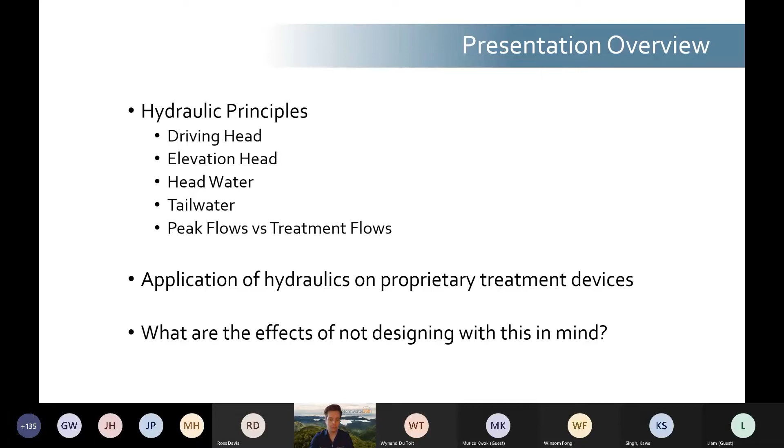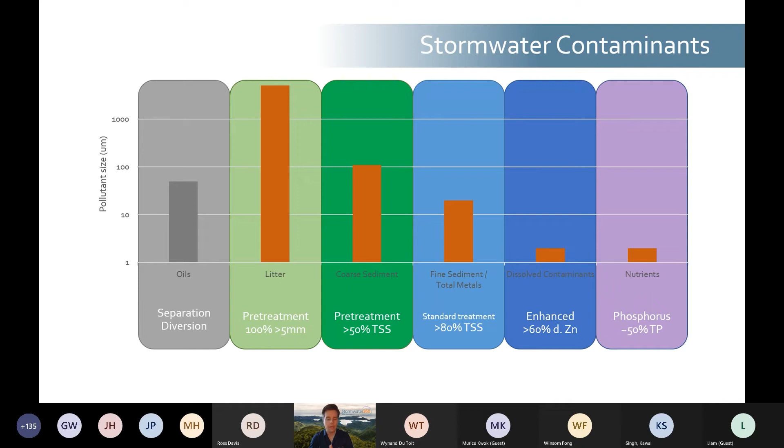Typically for oils and hydrocarbons, we look to divert. For pre-treatment, we're looking to capture 100% of litter and trash greater than 5 mil, and down to the standard treatment, in New Zealand the standard is around 75% TSS removal, while overseas it's around 80% TSS removal. For each of these types of treatment, there are different types of treatment devices designed to provide that level of treatment. For example, within the pre-treatment perspective for coarse sediment, generally speaking we're targeting 50% TSS removal, and that is achieved using a gross pollutant trap, a GPT, or a hydrodynamic separator.

If we're looking to do nutrient removal, we might have to go towards green infrastructure. That might be a rain garden, a swale, a wetland, a pond, or even a filter or a bioscape. So within each type of treatment, there is a range of devices.

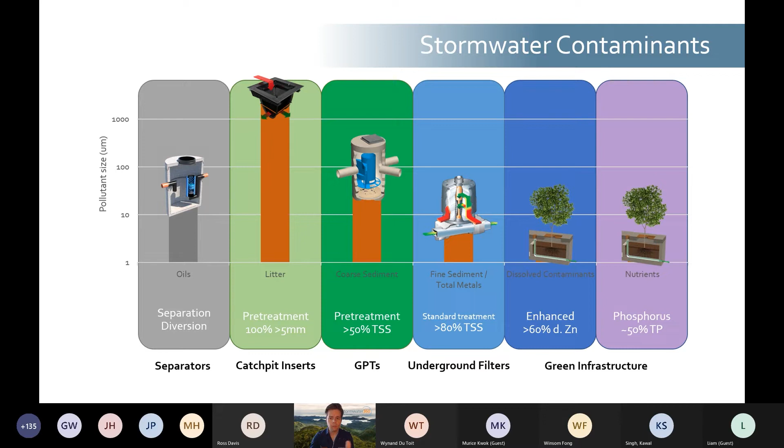Within regional council, district and city council guidelines, there are steps laid out for how to design treatment devices. Auckland Council has GD01, there's the Waikato Stormwater Management Guide, the Christchurch Waterways and Wetlands Guide, and NZTA, now Waka Kotahi, has a stormwater treatment standard for state highway infrastructure.

What is really important to note, though, is that these guidelines lay out the level of treatment that is required and the type of devices that can be accepted. But these aren't based around the hydraulic design of proprietary or manufactured treatment devices.

So if the guideline looks at the design of a sand filter, that is from first principles, looking at the driving head and so on. Same with the rain garden, it is a first principles design of how to design that treatment device rather than a proprietary device. But also importantly, they look at the device in isolation and don't talk about the integration

of any treatment device, whether proprietary or not, into the stormwater network, from a hydraulic or other perspective. So back in 2016, Kevin and Troy Brockbank, who was with Stormwater 360 at the time, wrote a paper for the Stormwater Conference.

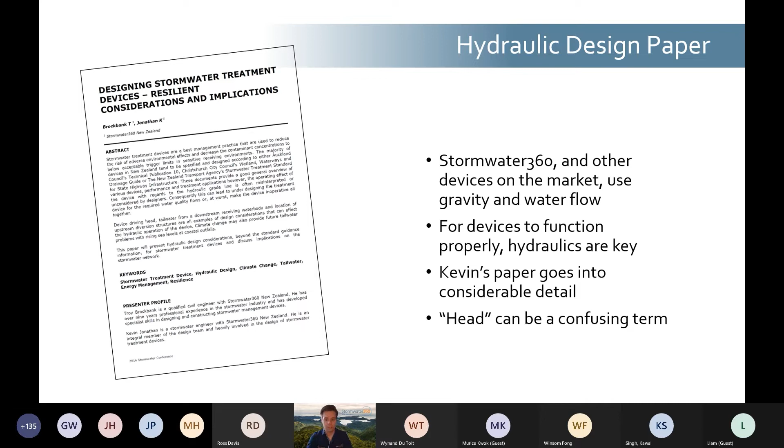Cool, thank you for that, Matt. So today we're just going to briefly go through some of the basic hydraulic principles that can be applied if you want to design a hydraulically efficient treatment device.

Many of you are probably already familiar with this when designing a reticulation network. Just bear in mind that the hydraulic design of a stormwater treatment device is no different to a typical node or junction. One of them, as you can see on the screen, is a continuity equation, a simple flow calculation using the product of velocity and cross-sectional area of flow.

Next is the energy management for flow in a pipe. It is basically the total energy upstream equal to the total energy downstream plus head losses from friction. You can see the graphical representation of that in the presentation.

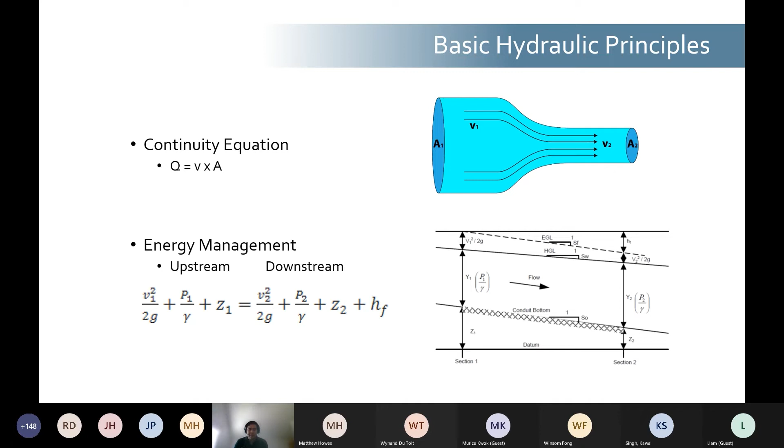So next is the hydraulic gradient, defined by the change in hydraulic head or driving head over the change in length, usually represented by the hydraulic grade line. It can be calculated in either the horizontal plane or vertical plane, as you can see in the graphics as well.

So next is Darcy's law. It is the principle used to calculate the driving head required for flow of fluid to go through a porous media.

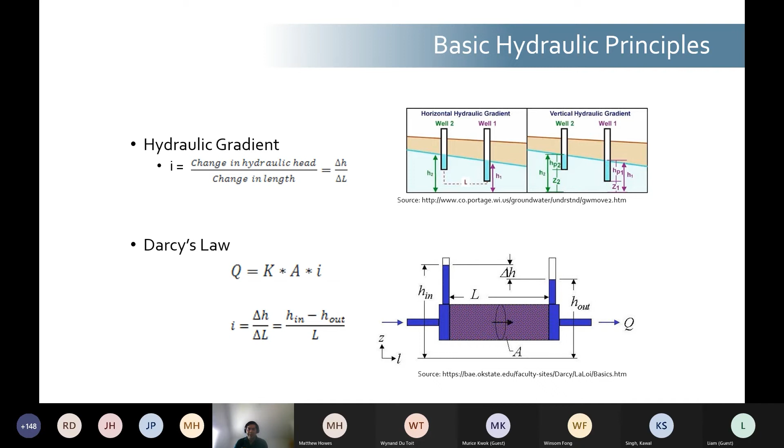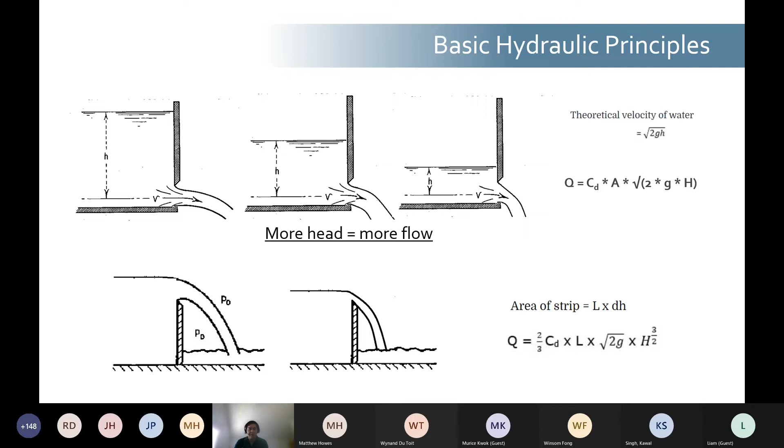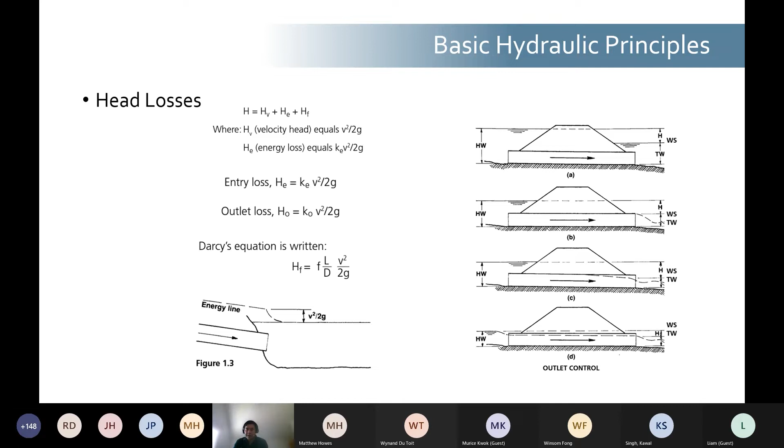So what we're going to do is take some of these principles and terminology and apply them to our proprietary treatment devices, and we're going to categorize them by the type of device and their general functionality.

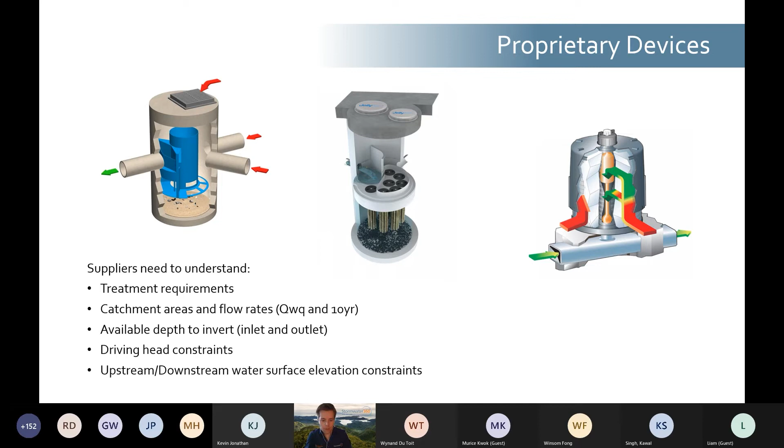So what I'm going to do is pass to Kevin, who's going to run through elevation head.

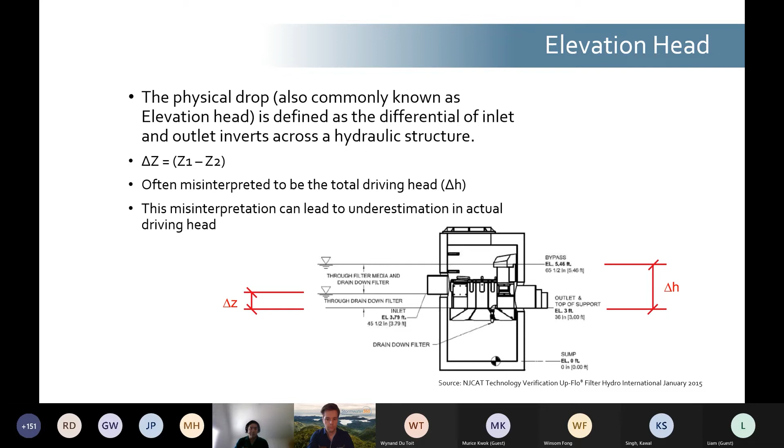If you actually use delta Z as the total driving head in the hydraulic grade line calculation of the network, you will have an unintended surcharge to your upstream pipe network. If this isn't accounted for, it can cause localized flooding to the upstream catchment. Matthew will now go through some examples of this physical drop using a few of our treatment devices.

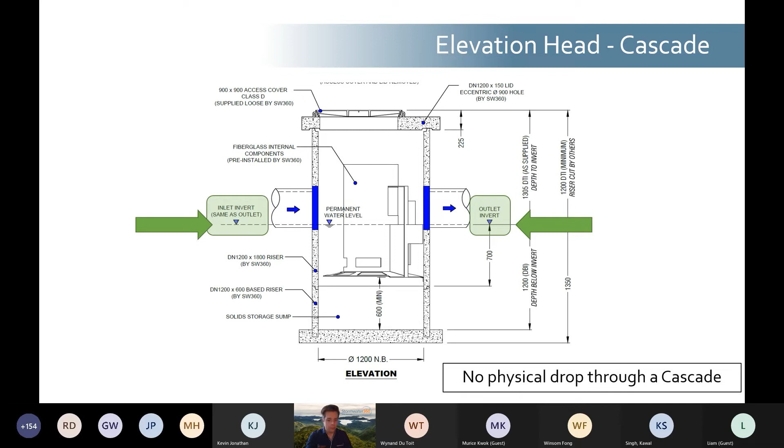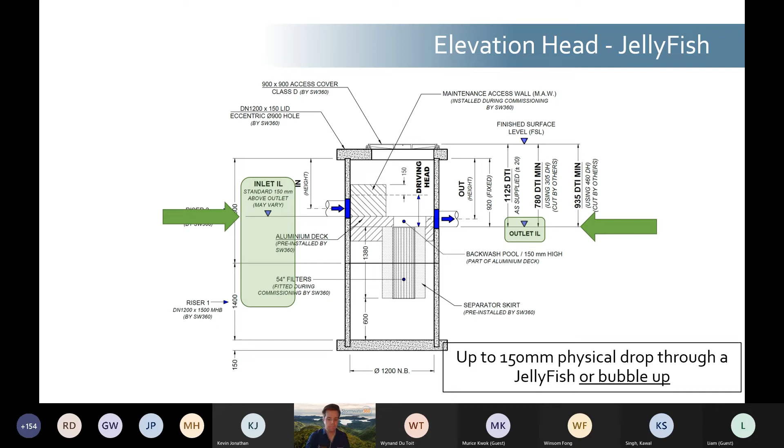So you can see that for these devices, the GPTs, gross pollutant traps, the inlet and outlet are at the same level, but for other treatment devices, there is a range of falls, or elevation head, or physical drop through those devices.

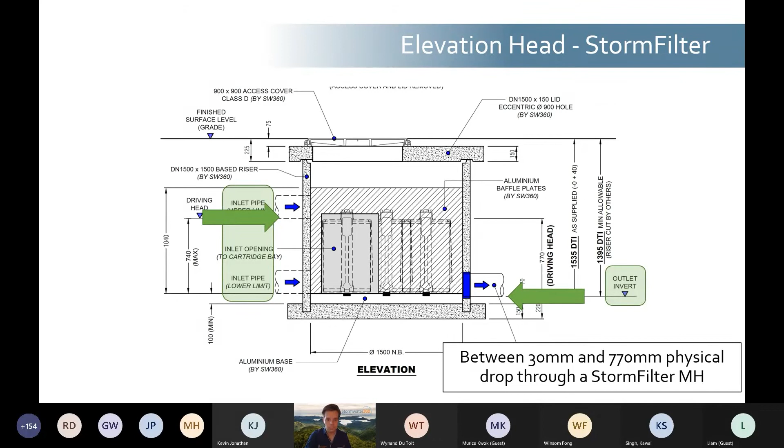But it's basically the difference between upstream and downstream water surface elevation. Driving head is one of the most important components to consider when designing a stormwater treatment device. All stormwater management systems require driving head to operate their treatment mechanism, and without sufficient driving head, it will effectively reduce the treatable water quality flow or volume it was designed for. Contaminated stormwater can also prematurely bypass or overflow the device.

And as previously discussed, if we don't consider the total driving head, it can cause unintended surcharge to the upstream pipe network. And when it's not accounted for, it can cause localized flooding.

Now, all treatment devices are hydraulically different. They have different operating mechanisms, so each device will require a different operating driving head to treat the same treatable flow rate. For example, a traditional sand filter used to require about a meter of driving head. A rain garden requires about 200 mil of ponding on top. So the driving head is independent of the physical drop through the device.

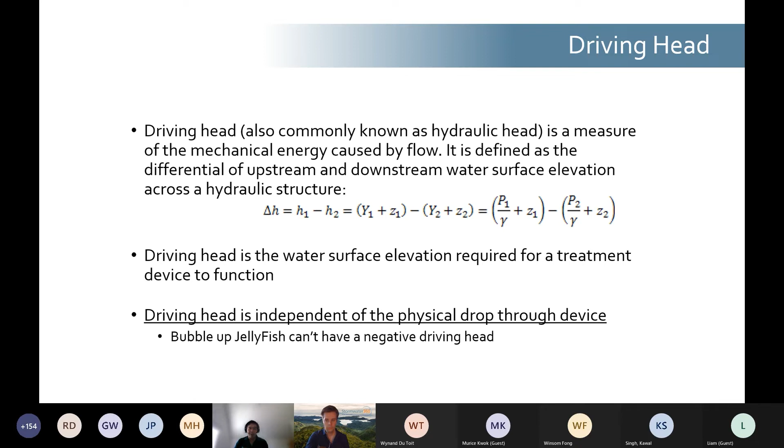Thanks, Kevin. So with the cascade, the inlet and outlet are at the same level, and for this particular device there is 1.2 meters depth below the outlet invert. So there is a permanent water level within the device.

As flows start coming in, the treatment mechanism for the cascade directs water into this central treatment chamber from both sides. So you have two opposing vortices, and then flows out and over the top of this weir here. That is the treatment mechanism of the cascade, and the weir here shows the minimum driving head for the cascade - that's for water to start flowing out.

What is important to consider, though, is the driving head of a cascade, and of any device that uses hydrodynamic separation and weirs to control the flow, is that the required driving head will be a function of the device size and the treatment flow rate. If we think back to the cross section Kevin put up earlier, it's the same as designing for a weir. Obviously, if you have a larger device but the same flow rate, your driving head will be less.

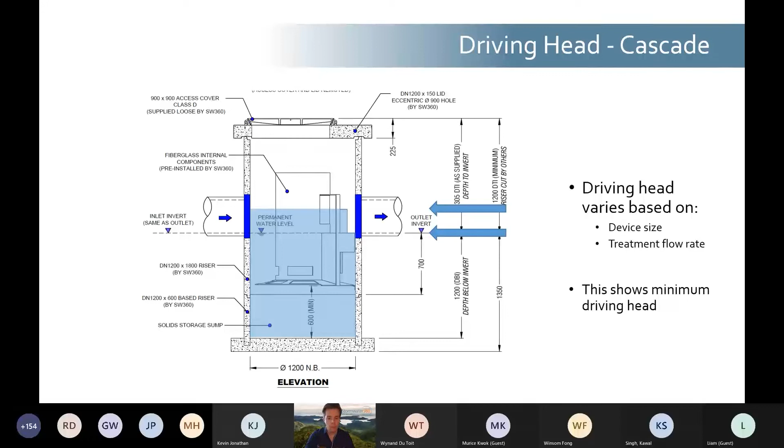With the jellyfish, the driving head is shown here on the drawings, and this is the driving head required for the jellyfish to operate at its designed treatment flow rate. So water builds up, comes in through the inlet pipe, builds up behind this maintenance access wall, and starts to flow up through the cartridges here and then through to the outlet. So you can see here this is the driving head for the jellyfish.

It is measured from the outlet invert and is typically controlled by an upstream weir that diverts peak flows around the jellyfish. As standard, the jellyfish has 457 mil driving head, but we can go down to as little as 150 mil driving head. However, as we've already discussed, the less driving head you have, the less flow you'll have. So to treat the same flow rate with reduced driving head, you'll need more cartridges and a bigger device. With the jellyfish, the cartridge size and the driving head both independently affect the flow rates through the device.

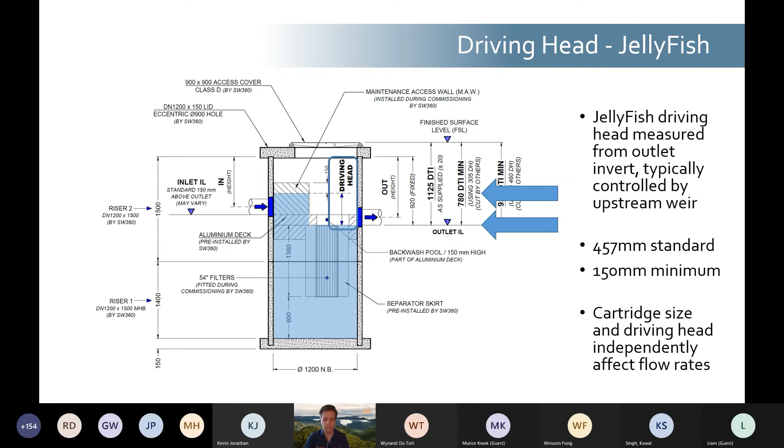But it's important to note, with the jellyfish, the driving head stays the same regardless of the inlet level. So if we consider the physical drop through the device, regardless of where the inlet sits on that sliding scale, the driving head will always remain at the same level. So if you have the inlet lower than the driving head level, then the upstream pipe will be temporarily surcharged.

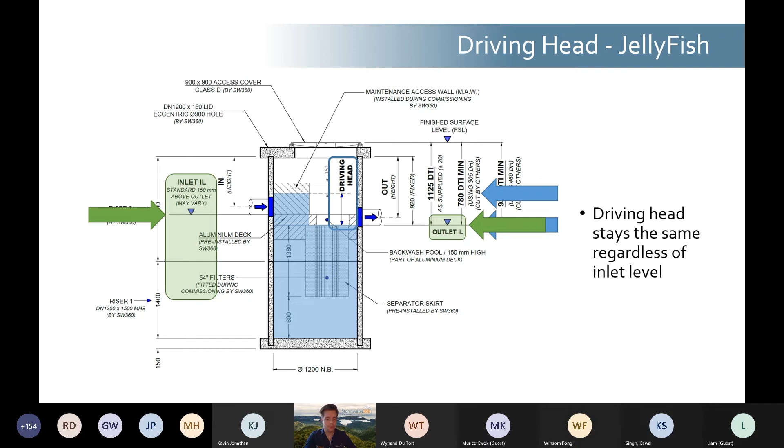And then with the storm filter, the driving head, again shown here on the drawings, is a function of the cartridge height. As water flows into the storm filter, you can see here there are floats inside each of the cartridges.

The driving head is the water surface elevation required within the storm filter for those floats to lift up and the siphonic treatment action to start. In the storm filter, that is measured from the outlet invert level to the water surface elevation inside the device for the treatment mechanism to start and the device to operate at its designed treatment flow rate.

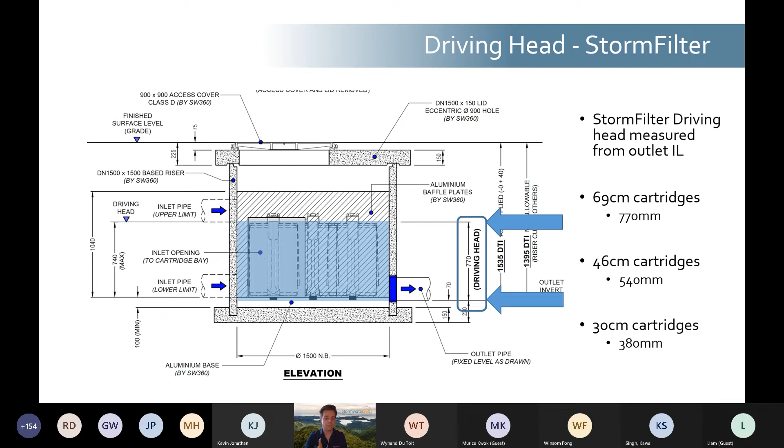Again, with the storm filter, there are 3 cartridge sizes and 3 driving head options: 770 mil, 540 mil, 380 mil. But again, it's a trade-off. If you switch from the large cartridge to the small cartridge, the treatment flow rate per cartridge decreases, so to treat the same flows, you need proportionally more cartridges.

Looking at how the driving head relates to the inlet and outlet level, with the outlet and the inlet able to sit on a sliding scale, that water surface elevation stays the same regardless of the inlet level.

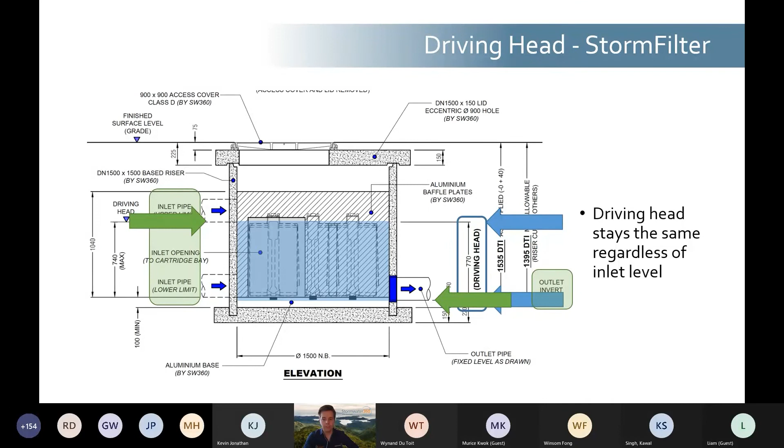So if you have 69 centimeter cartridges, you'll have a 770 mil driving head, even if you've only got 100 mil physical drop through the device. As a result, then, you might have some headwater caused by the device. So I'm going to let Kevin run through headwater now.

Thank you, Matt. So headwater, also known as backwater, occurs as a result of downstream obstruction or restriction, such as a weir or orifice, or as Matt said before, a treatment device or mechanism.

But this is typically promoted on volume-based devices, which rely on low fluid velocity and energy dissipation for sedimentation to occur. Examples of that are ponds or wetlands. It's also a treatment mechanism that's typically used by hydrodynamic separators, such as the cascade, as previously Matt said.

So an example shown here is a hydrodynamic separator that uses an orifice to raise the water level quickly, creating a vortex as its treatment mechanism, to reduce velocity and promote sedimentation as well.

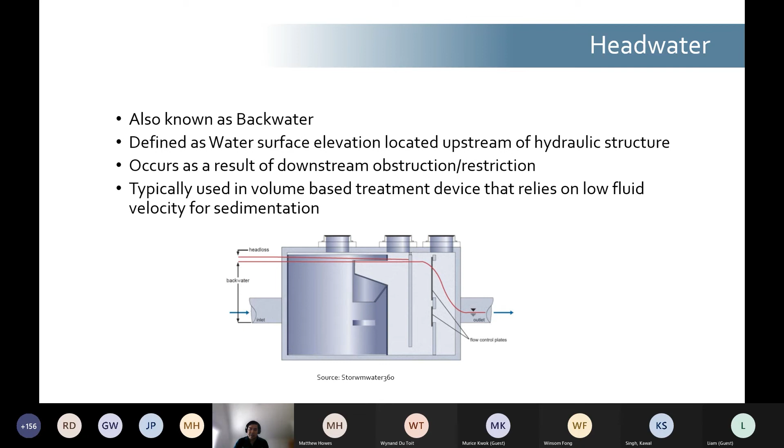But remember, once you create a backwater, you will surcharge, you start surcharging the upstream pipe. So an example from the treatment system we had before: the treatment system had a physical drop of delta Z, and

the driving head before the overflow is shown as delta H. So with this example, the system will surcharge the upstream network, and the headwater created by the system is basically the difference between delta Z and delta H, and also further head losses from friction, or if there's further hydraulic structures, it would be exit and entrance losses as well.

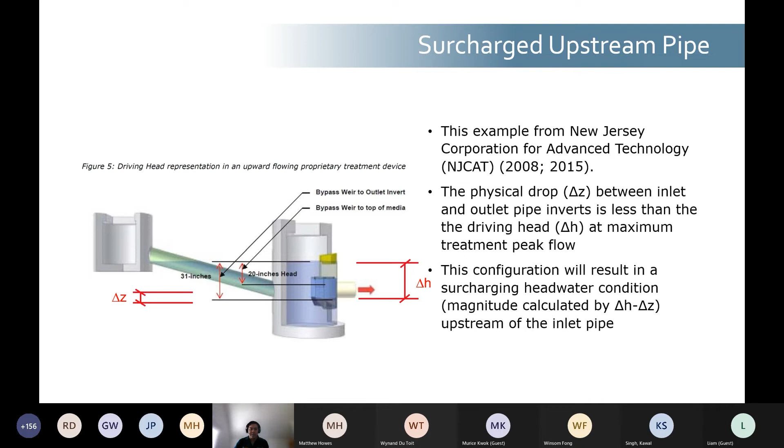Now we'll start talking about tailwater, which is defined as the water surface elevation downstream of the hydraulic structure. There are two distinct types of tailwater: permanent and operating tailwater. The permanent tailwater is usually caused by a permanent pool, typically a natural water body such as streams, lakes, or sea, or even sometimes from a submerged network.

The operating tailwater is caused by a depth of flow in pipes or channels, or it can be from a detention tank. Tailwater condition is an important consideration when designing a treatment device, as it can directly affect the available driving head, which can also affect the maximum treatable flow rate and the operating mechanism of any treatment device. So now Matt will show you how tailwater can affect stormwater treatment devices using some of our systems.

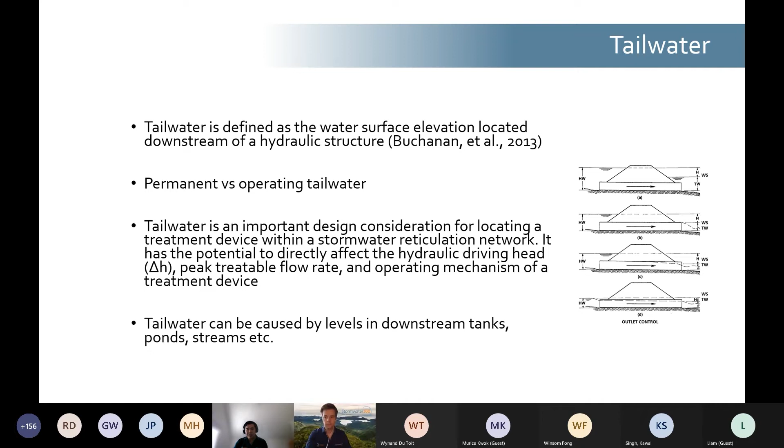So we'll take, for example, the StormFilter. As we've already established, the storm filter, just like all other treatment devices, has a driving head requirement for it to function at its design treatment flow rate. The driving head for the StormFilter is measured from the outlet invert level, and that is assuming a free discharge pipe.

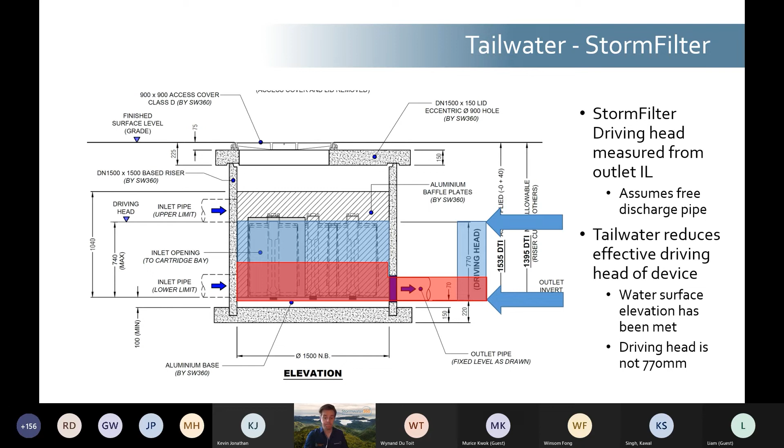So what are the effects of tailwater? We reduce the treatment flow rate as a result of the reduced driving head in the system, and as a result, the system can prematurely bypass. So if we've designed to treat a certain flow of water, the system will bypass before we're treating that flow of water. Therefore, the full first flush and water quality flows will not be treated, potentially not achieving the outcomes required as part of consent conditions.

If we're designing with operational tailwater, just as if we reduce the driving head by going down a cartridge size, we have to include more cartridges to accommodate the reduced flows. One other issue with tailwater acting on a device like the StormFilter is you can resuspend previously settled out materials, which operationally will lead to issues. From a maintenance perspective, tailwater, if regular and prolonged, can lead to biofouling of the media. There's risk of the media prematurely clogging, requiring more frequent maintenance.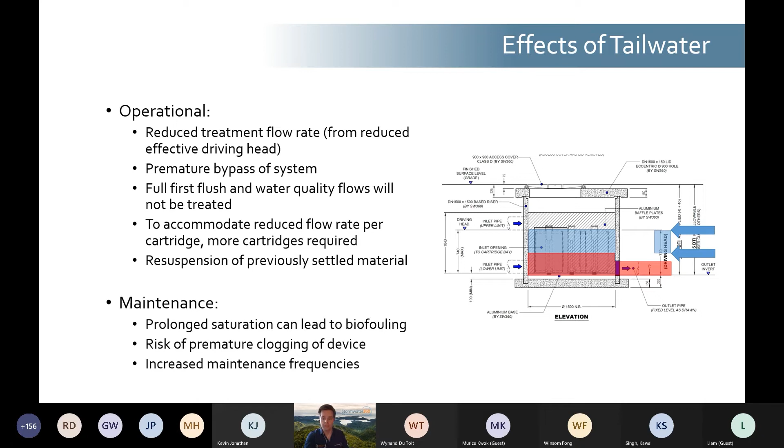Something else interesting to consider is tailwater still has to be considered if we're designing with green infrastructure devices, and the hydraulic design of green infrastructure devices is also important. There is still physical drop through the device, there's still a driving head requirement, and the device should be placed offline. Just as with other devices, tailwater will reduce the effective driving head of a biofiltration device. But importantly, tailwater and/or permanent water can cause nutrient release from organic matter contained within the device, so it's even more important to consider with biofiltration.

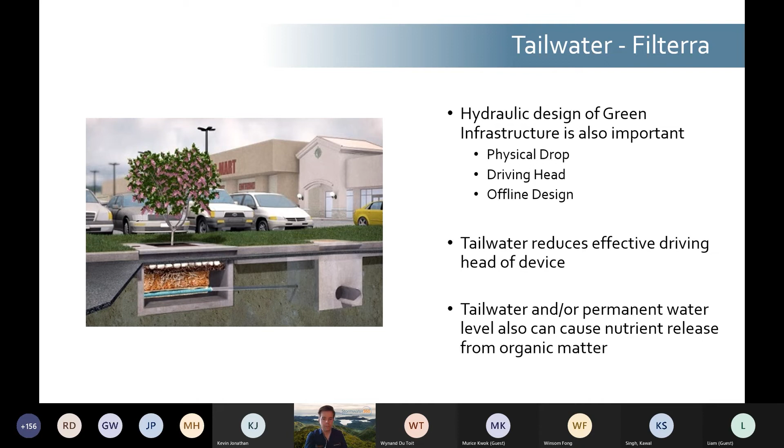We're going to look now at the example of our Filterra biofiltration device. Again, with Filterra, we've established that there is a driving head required, and the driving head in the Filterra is measured from the outlet invert to the ponding level of the device. Again, this assumes a free discharging pipe.

Tailwater, just as before, will reduce the effective driving head of that device. So you can see here the tailwater is effectively reduced. The ponding level that we've designed for has been met, but the driving head is not the full 915 millimeters, so we're treating less water.

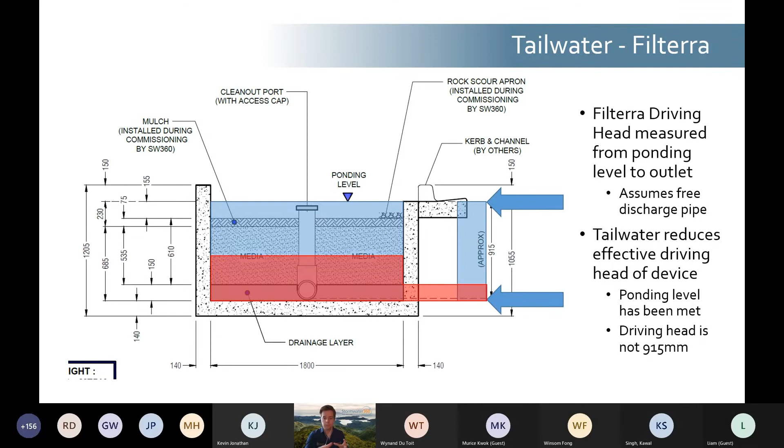We're fully aware that it's virtually impossible on most brownfield sites, and a lot of greenfield sites now, to design with absolutely no tailwater in the system. A lot of places simply don't allow it, and I feel for Anton, our business development manager based in Christchurch, with a pan-flat city to deal with.

Ideally, we want to design so no tailwater acts on a treatment device. However, in some cases temporary tailwater can be acceptable, but there are some conditions we try to meet. First is that there's no tailwater during the water quality event, the 10 mil an hour rainfall intensity, to make sure that at that event we are treating the full flows and the treatment device is designed to treat what it has to treat, and we're not going to prematurely bypass.

However, flows in excess of that we can deal with, but we try and limit tailwater to at least a 2-year storm event, preferably further, with a drain down time of a few hours rather than a few days. If you're designing one of our devices with temporary tailwater, we take a look at the network design to see if there are any concerns about operational or maintenance issues.

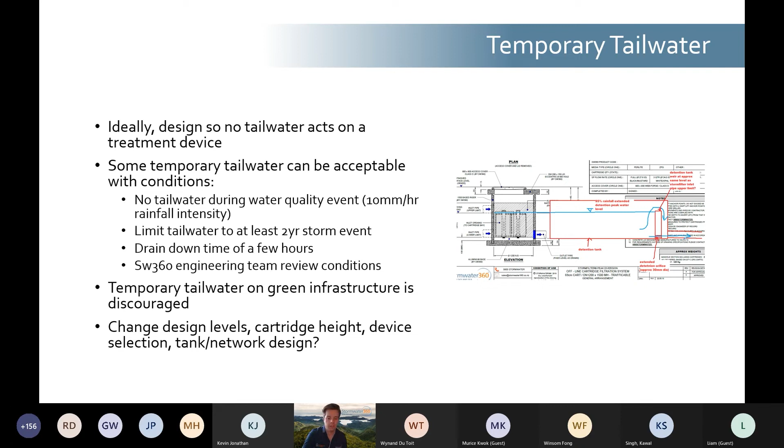So if we take a very simple design, catch pit to storm filter to detention tank, we have a discharge invert and a lid level. There is a driving head requirement of the storm filter, but once flows start coming in and are restricted by the tank, there will be a tailwater condition placed on the storm filter by the detention tank.

So the first option is to change the tank design, either by lowering the tank or reducing the height of the tank. By reducing the height of the tank, we can remove or reduce the tailwater condition from the storm filter. However, oftentimes that's not practical because you have a council connection that you need to connect to.

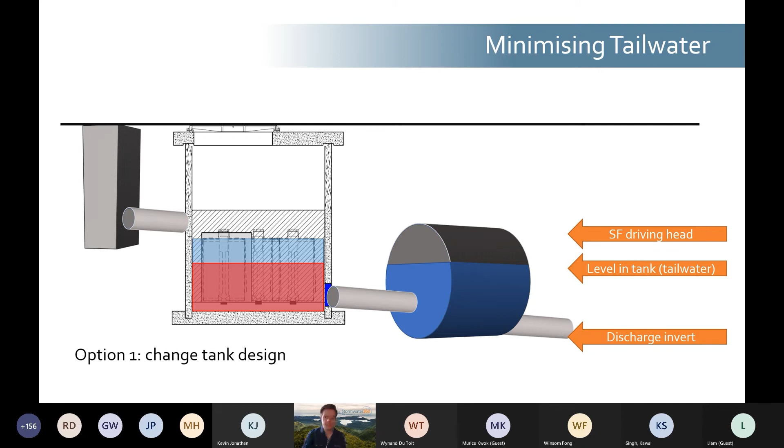So the other option is to change the filter design. We can reduce the depth to invert, change the cartridge height to lower the driving head requirements, and make the unit non-trafficable. By raising the storm filter up, we bring the outlet invert above the water surface level in the tank, reducing the tailwater acting on the storm filter.

However, at this point we need to look at the network as a whole, because there is still that driving head level within the storm filter, so that could surcharge the upstream network, and we need to make sure we're not negatively impacting the structures upstream. So that's a few options for minimizing tailwater, and now Kevin's going to talk through how we manage peak flows within a network.

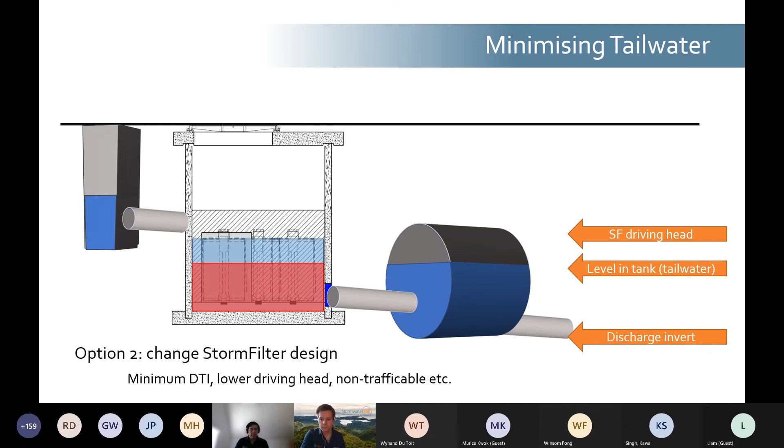So yes, a stormwater treatment device can be installed in either an online or offline configuration. Historically, treatment devices were installed in an online configuration, where all peak flows go through the treatment system. However, remember that treatment devices are typically sized to treat only the water quality volume or water quality flow.

But the network is designed to convey the 10-year or even up to 100-year peak flows. So during these higher peak flows, when it goes through the treatment device, it can resuspend the settled sediment, even scour media and green infrastructure systems, and the peak flow could potentially damage the physical hydraulic structures or even the treatment mechanism. Another important consideration is the driving head required to discharge the peak flow to the internal overflow system.

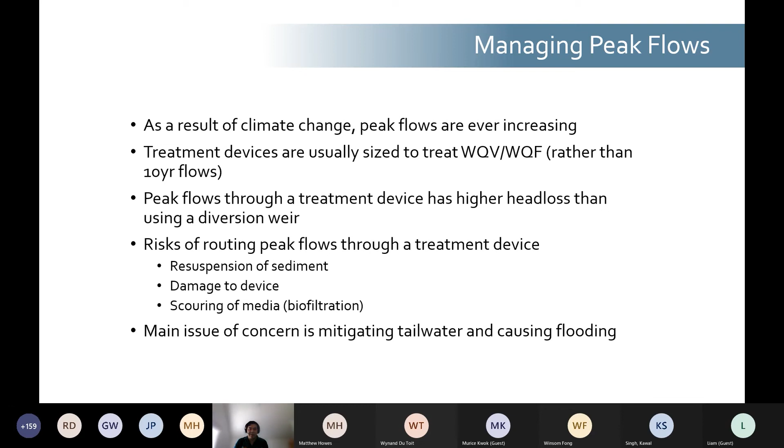So the way to manage these peak flows is to place the treatment device in an offline configuration. This is where only the water quality flow goes through the treatment chamber, and the higher flows in excess of that bypass the treatment chamber. So offline configuration is the best practice for all stormwater treatment devices, and now some councils have started to enforce designing all stormwater treatment devices to be offline.

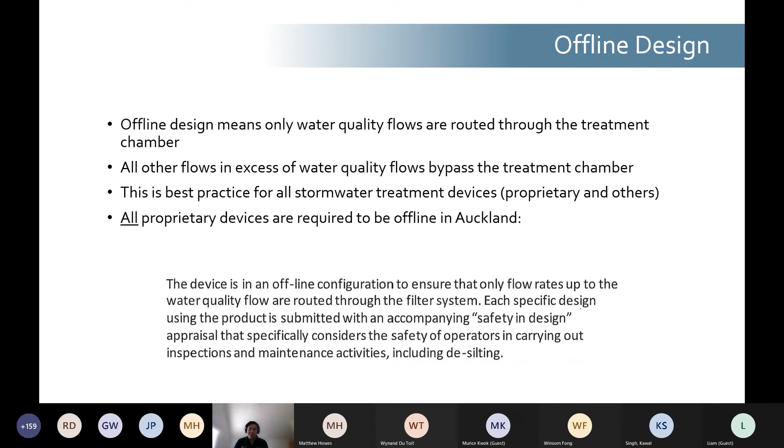The advantage of putting the system in an offline configuration is reducing the driving head required to discharge the peak flows significantly by increasing the length of the bypass weir, and that is a very important consideration for shallow sites to prevent any localized flooding. Again, this is probably quite an important consideration for Anton and Christchurch region.

So now Matthew will show you again an example of how to put a treatment system in an offline configuration.

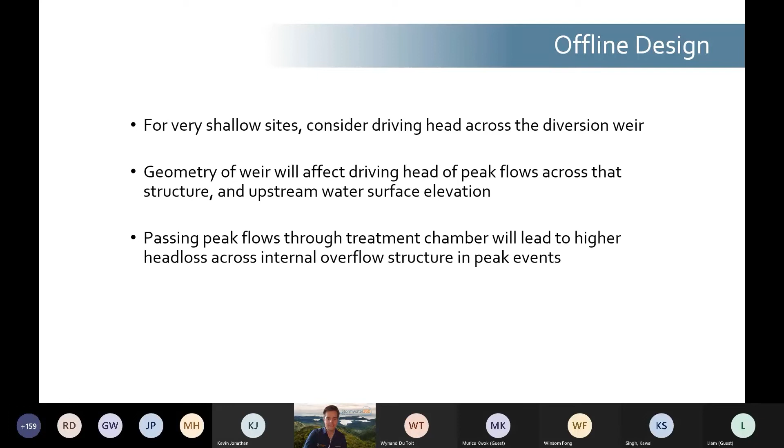Anton's getting a lot of flack in this one for shallow sites, but it's not just Anton, it's across the board as well. So offline design is, as Kevin said, where we're routing the peak flows, bypassing them around the treatment device.

So this is a typical offline configuration. We have a receiving structure and we have the treatment device, and there is a weir in that receiving structure that is set at the driving head level of the treatment device. So water flows into the receiving structure, and the weir preferentially diverts flows to the treatment device.

But once the treatment device's driving head level has been met and the device is operating at its designed treatment flow rate, this will surcharge, or the water surface elevation in the upstream network will reach the level of the weir, and then flows in excess of the water quality flows will bypass over and around the treatment device.

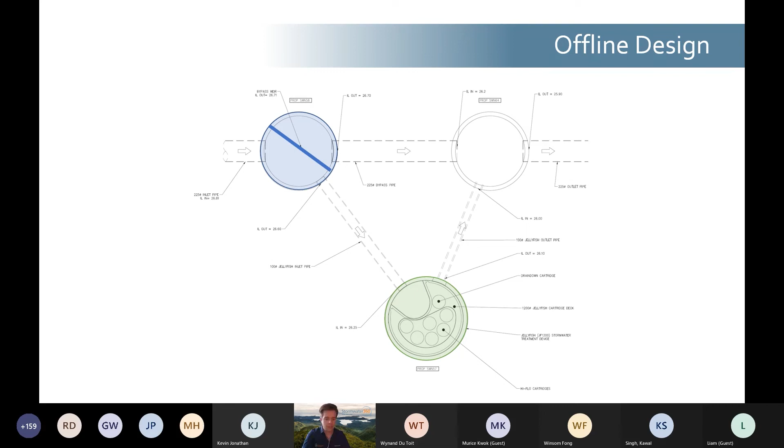So what does this look like in a long section? You can see here we have on the left the receiving chamber that has a weir, and then on the right hand side we have a jellyfish, and you can see here that we have the DH, so the physical drop through the device, and the driving head, the design driving head of the treatment device.

So as water starts flowing in through the system, it will preferentially flow to the jellyfish, and water will continue flowing to that until it reaches the design treatment flow rate. At that point, flows in excess of that will bypass over the weir in the receiving structure, ensuring that the treatment device is kept offline and the peak flows don't go through it.

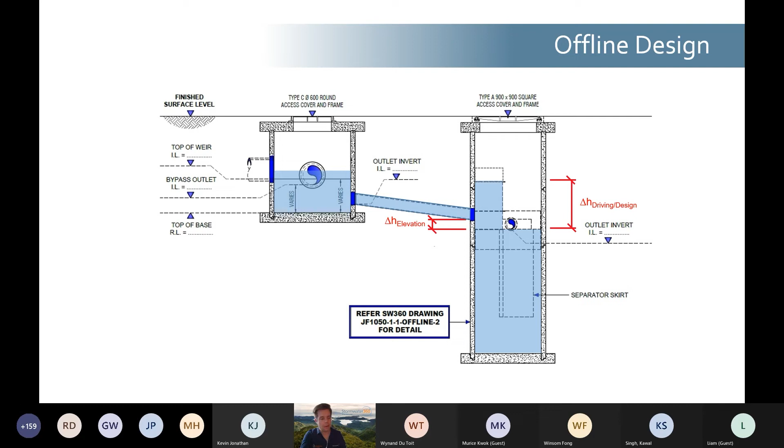Another option, which we're able to do with both the Jellyfish and the StormFilter, is provide that within one structure. So we have the receiving and bypass chamber here, and the treatment chamber here, and then the peak flow diversion weir sitting in there.

Flows coming in are preferentially diverted into the treatment chamber by this weir. Once the water surface elevation has been met for the design treatment flow rate, then water will then bypass over this weir and out, bypassing the treatment chamber.

So again, if we compare that to the situation we had before, we still have the receiving chamber and the bypass part of the device. We have the treatment part of the device. We're diverting flows within one structure across that. And as Kevin said, if the driving head is a concern for customized devices, we can look at and make sure that the head losses across that diversion weir will fit in with the network design.

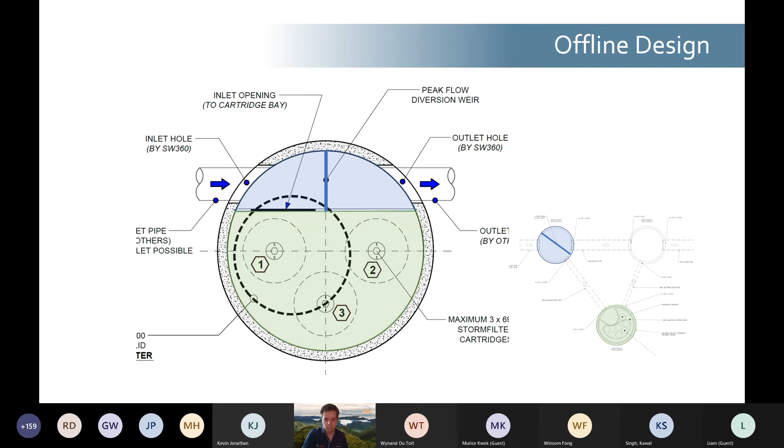So to go back and look at everything and sum it up, we've gone through some basic hydraulic principles, and how they apply, in isolation, to a treatment device, whether it's a manufactured treatment device or a sand filter or a rain garden or something like that.

But consider the fact that the council guidelines and stormwater guidelines out there don't look at the integration of these devices into the network.

So if you approach us for a design, we will ask you for the treatment requirements. Do we need a GPT? Do we need full treatment? Do we need something else?

We'll look at the catchment areas and flow rates, both the water quality flows to help us size the device, and the peak flows to help with consideration around that offline design.

We'll look to the available depth to invert of both the inlet and outlet, to make sure that we're providing a device that will physically fit into your network.

We'll consider if there are any driving head constraints, which will help us select the size cartridges, the device type, and we'll look at the upstream and downstream water levels to make sure there's going to be no tailwater or headwater issues. Then we can advise how our devices will integrate into your network.

So for relatively simple sites, it could be as straightforward as, here we go. But for ever increasingly complex sites, we can have that discussion and make sure that we're not going to negatively impact.

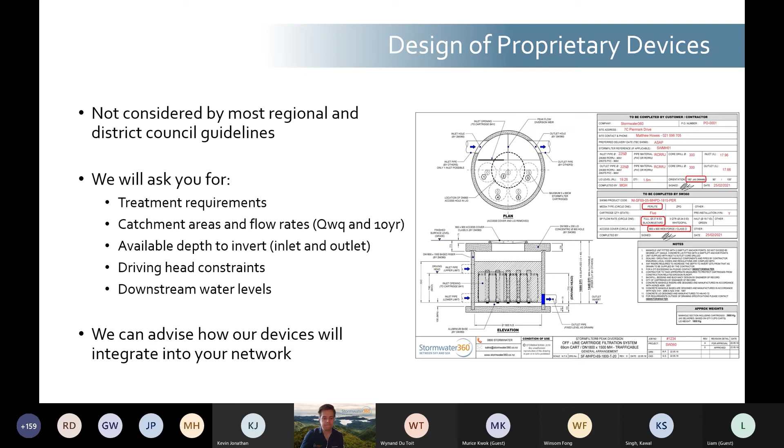So summing up the presentation, we've gone through some basics of those hydraulic principles: the driving head, elevation head, headwater, tailwater, and designing offline for managing peak flows versus treatment flows.

And we've looked at how they impact on proprietary treatment devices. If these aren't considered at the design stage, we can either increase the maintenance requirements of the treatment device, we can not treat the amount of water required by our consent, or we could inadvertently surcharge the upstream network and cause flooding, which is a pretty serious concern.

For example, Stormwater 360, as a treatment device manufacturer, we're in a position to help integrate our products into your design. And that's key: if in doubt, ask. That's what we're here to do, and here to help.

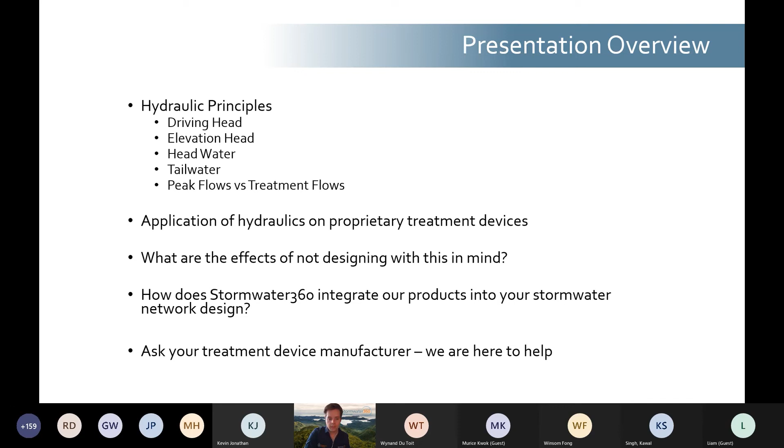Wynand, I wonder, are there any questions that have popped through for our team? Yeah, I've received 2 questions here.

Firstly, just thanks Matthew, thanks Kevin. It's quite a mouthful, and what I'm learning from this is that there's a lot of complexities, but I think you guys have covered the critical parts of it really well.

What I want to say to the rest of the audience is, don't panic, guys. This is why we have an engineering team, to support and help you with the designs to get this right.

Really, to reiterate what Matthew said, really early on in your design, try and make contact, do the checks. We can help with calculations on the flows. We can look at the hydraulics, the hydraulic impact that the devices can have on your network. So make use of that. It's good sense.

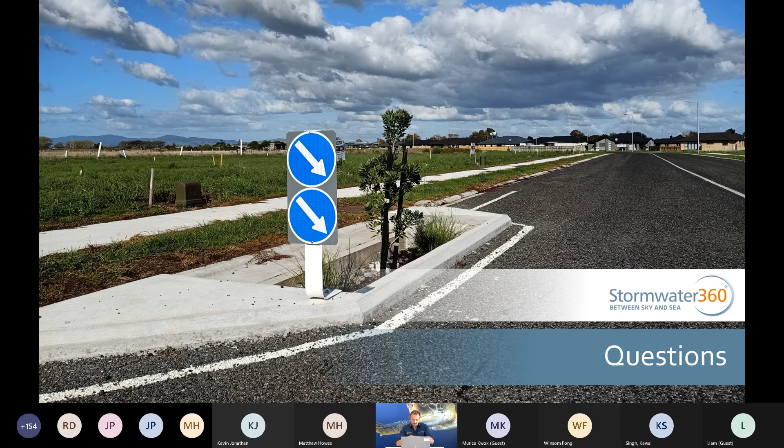There's two questions. The one is on rain gardens. It says the ponding depth in rain gardens is often commented as a trip and fall hazard. I think we get that also every now and then. Can you reduce ponding depth and just increase the area? What impact has the reduced ponding level on the functioning?

Kevin, maybe that's a good one for you. Yes, that's a very good question.

Basically, with the rain garden, as on one of the slides that Matthew had before, the basic principle for a rain garden is using Darcy's law, having the head or driving head over the porous media or soil. So really, that ponding depth is the driving head. If you want to reduce that, you definitely can. What will happen is a reduced infiltration rate through the media, meaning you will need to increase the surface media footprint to treat the same flow rate.

Okay, I'm not going to say who sent that to me, but I hope that answers your question. But you're welcome to make contact again.